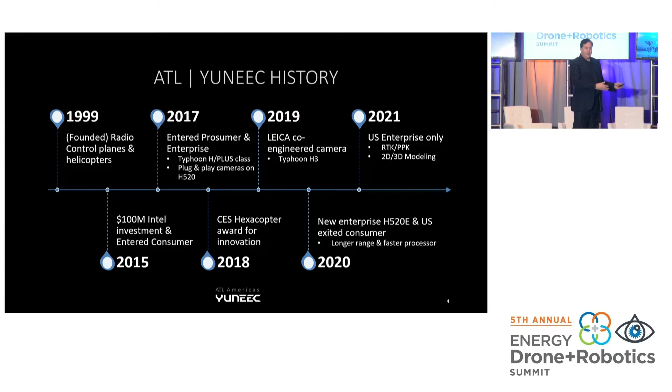If you've been paying attention to Yuneec, the company has a lot of attributes on the drone side. 2015 is when Intel made a $100 million investment to go into consumer drones. In 2020, we exited consumer drones, but along that way, it came up with an award-winning hexacopter design. That's what you see here up front. We'll show a little bit more about that. Great stability in the wind, good size, good performance, good pricing. And the company is exclusively focused now on enterprise drones and turnkey solutions.

So for the energy sector, what are we trying to do? We need a robot that's going to collect data. So here's a robot. This happens to be the Yuneec one, but all downstairs, there's many versions of these, and you've been hearing about all day.

What do you need? You need something that's stable. It needs to work all the time. It needs to be reliable. A windy day can't defeat you. A rainy day cannot defeat you if you're going to be doing this 24/7, scaling nationwide. The data needs to be secure. Lots of discussions on the cybersecurity front there. Best way to make it secure is don't broadcast the data, leave the data on the drone, only the user can access it.

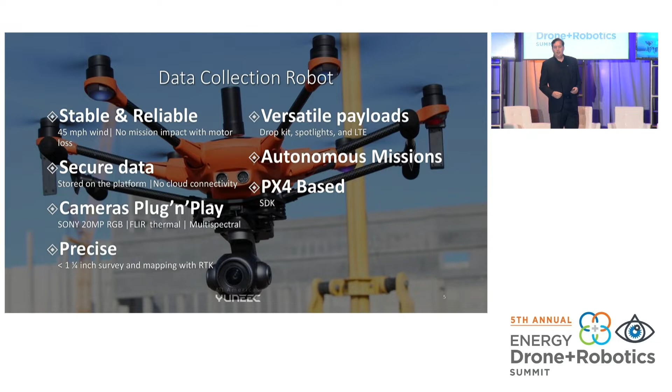No one camera does it all, so it needs to be versatile, plug and play on that. Of course you need precision. An RTK solution can do that. There are other ways to do that. Versatile payloads. What if I want LTE? We heard from Skyward this morning about their LTE network. What if I need a drop kit? All kinds of things. It should be autonomous. Today, one of the things that slow us down from scale is one pilot, one drone. How do I make more autonomous missions? And many of you would like it to be PX4 based, open source, I can add my own attributes to that particular drone or UAV.

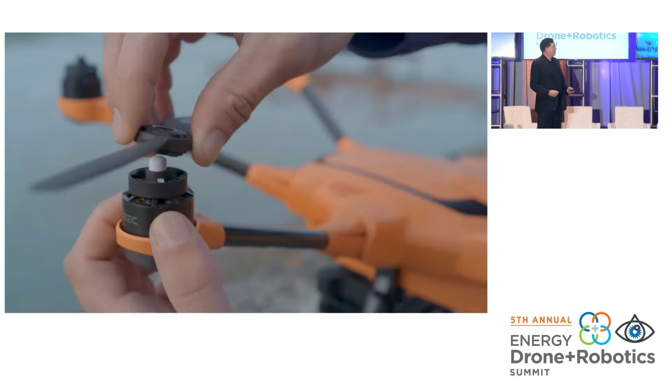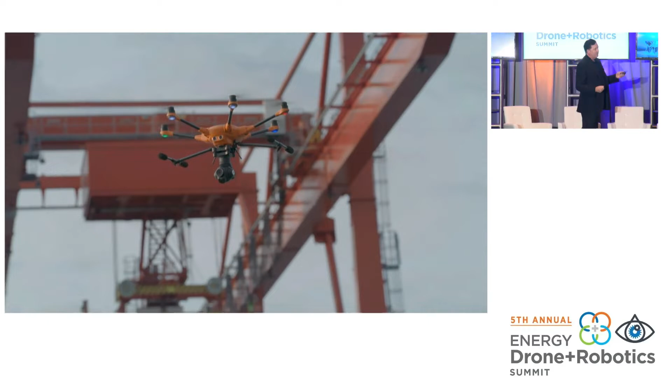So let's take a look at what this robot looks like. So here we have something that is carryable. You can also see it up on stage. I can have two pilots for safety, one looking at the payload, one flying the particular drone. This particular case, the landing gear goes up such that the camera can see 360 degrees. So I can fly the drone in one direction, I can point the camera in another.

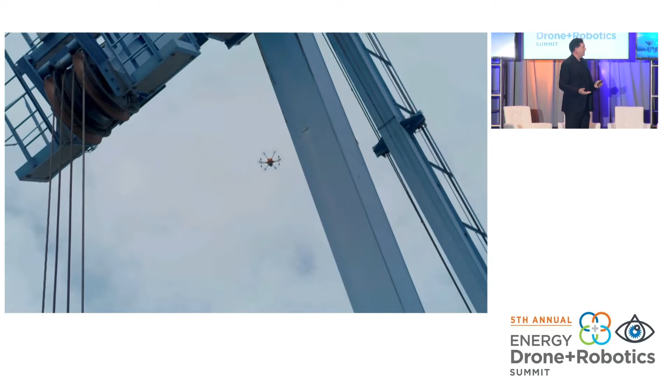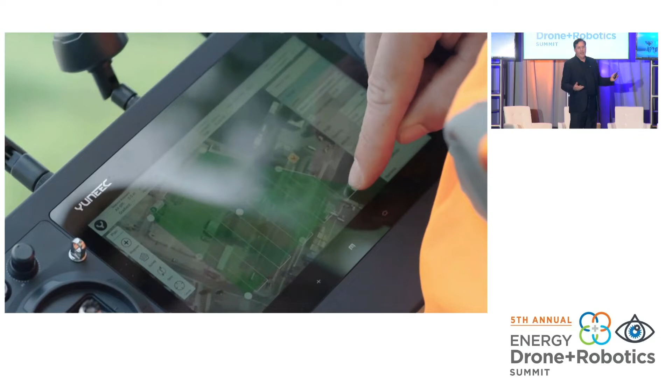Again, that's versatility. So here you can see that the drone is flying around in a port environment, very heavy in metal. I can do my autonomous mission. So here I'm looking at a map. I'm deciding where I want to do. This is a construction site that we're looking at here.

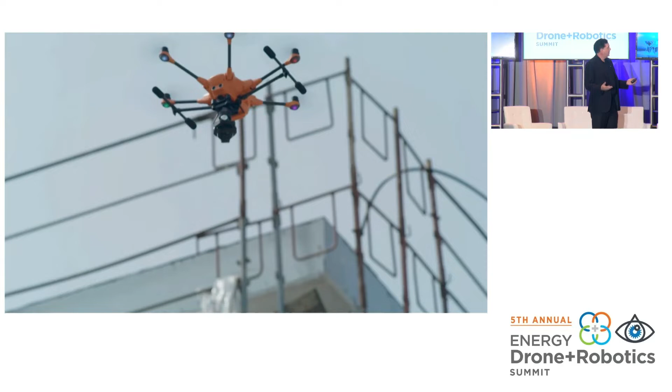It needs to be easy to fly, easy to use, portable, as I've said before. So here I'm showing you that autonomous mission, because now I want to fly a mission. Maybe I want to fly it one day, every day, once a week, once a year. I want to see what has changed time and time again.

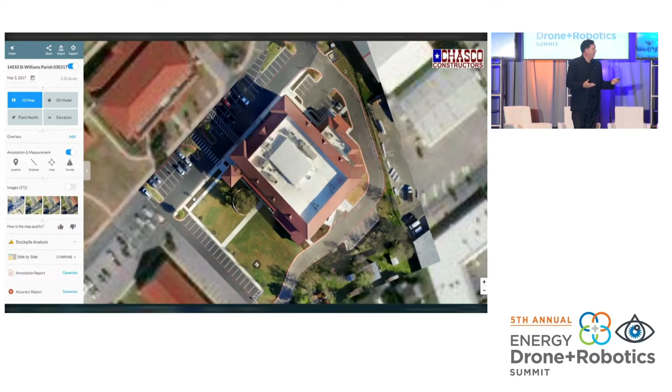So that mission planning needs to be simple. Here's some tools that are showing you what has changed over time. This is using, again, photogrammetry, the drone, the camera, in this particular case, a well-known data side.

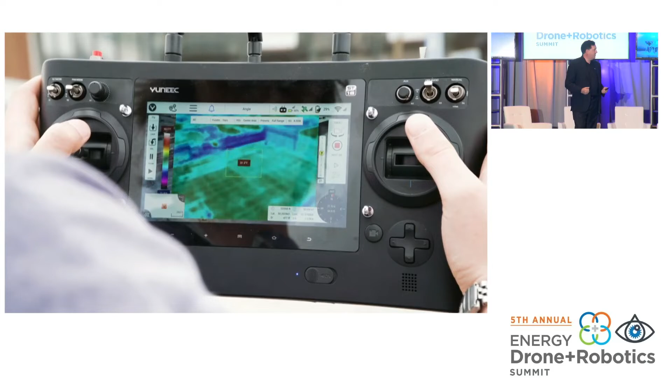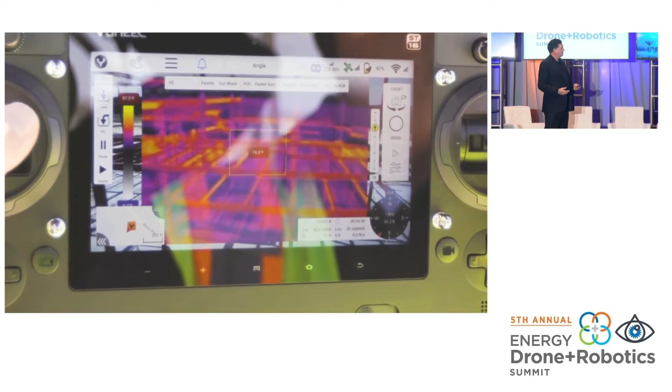Here I'm using a thermal camera for inspecting a building. I'm actually inspecting the quality of this particular building. This is actually Chasco Constructors here in Texas. So again, that versatility in cameras. Lots of different types of things that one can inspect. We have a customer in Arizona who uses the drone for orthomosaics, so they can actually make a commercial view

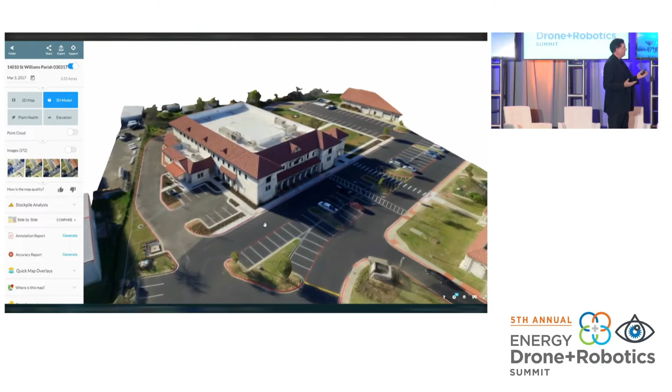of the building as it is constructed over time. But this could be a power plant, this could be a gas plant, this could be a pipeline that we're doing with these things. So here we're inspecting a particular roof. This is a 640 by 512 FLIR sensor. This was actually a project that Universal Aerial Ventures had. The straight lines there are actually the power lines on the roof of the building.

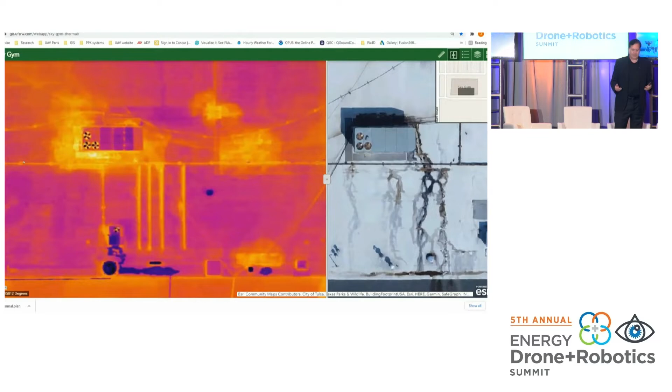I can detect water leaks. But this is a real service providing actionable data.

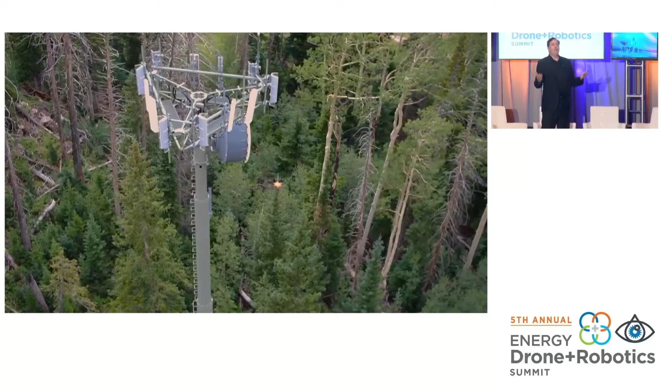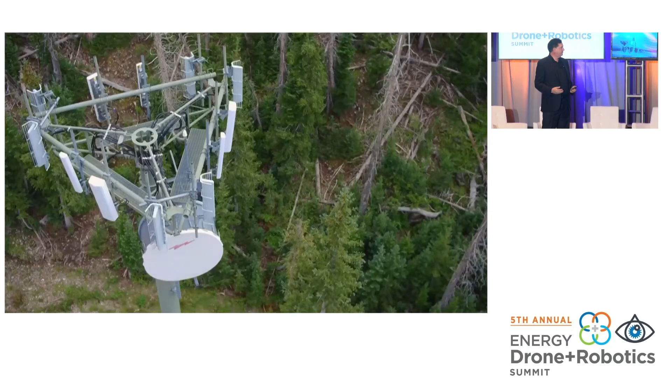Here in the final segment, towers. I want to inspect a particular tower. Stability in the wind is key. Again, reliability, everything that we've talked about, those attributes, for a particular drone. We know many tower companies would like to be able to see the labels on the back. I'm not sure I recommend flying as close as this pilot was flying to these antennas.

They are expensive, but that's the robot. It's three-dimensional, it's carrying a sensor - it can be a methane detector, it can be a camera, it can be thermal, whatever you need for whatever it is I'm trying to measure. If I'm trying to measure any type of change, you want that versatility.

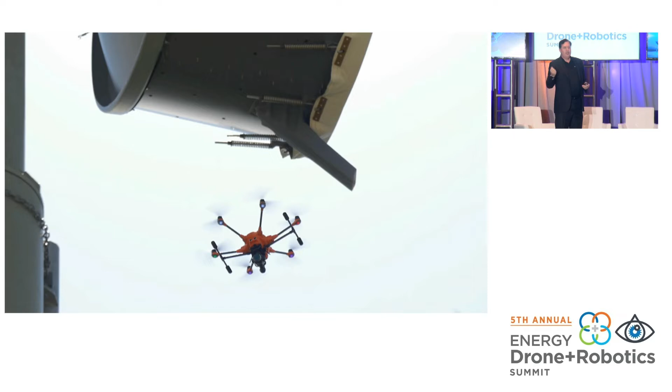So robot, data collection - we've talked quite a bit about autonomous missions. There's no such thing as one size fits all. I might want to survey a structure. I may need a particular corridor that I'm looking down if I'm doing a highway inspection or a long pipeline. Or a wall or facade if I'm doing that tower type of inspection.

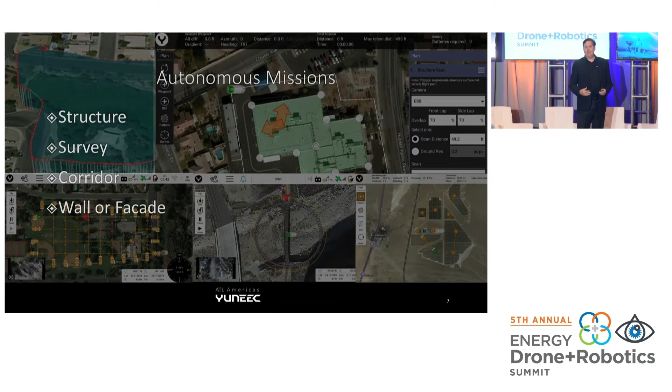Again, these are just attributes. Obviously, we're showing you here the Yuneec drone, but these are the attributes you're going to want in any type of UAV. So now that we've collected the data,

what do we need to do with it? So I have this data. We've partnered with a company called Skyline Soft. This is using their PhotoMesh and Terra Explorer. So here, a drone just like this was pulled out within about 10 minutes. It's flying a particular mission, and a few hours later we're looking at specific measurements within centimeters of what's going on. What you saw earlier was trying to fix what a fence line should look like.

This is for public safety. I want to see the sight lines. The green is what the person can see from that spot. The red was what I couldn't see.

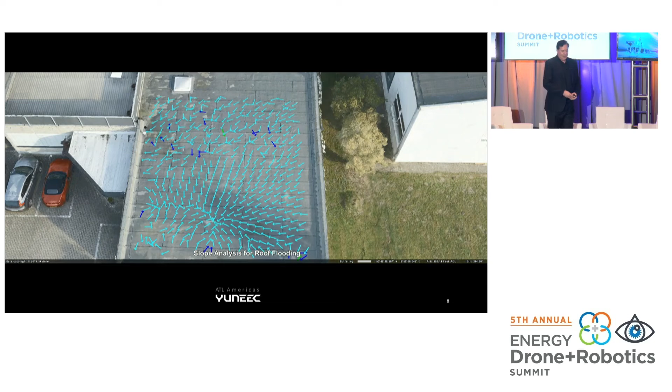Here I'm going to look at slope, like where would water collect? And I'm just looking at a picture here that the photogrammetry gives you, but then the drone is providing that actionable data - do I need to do something different to my building? Here's a quarry. This was taken one week apart.

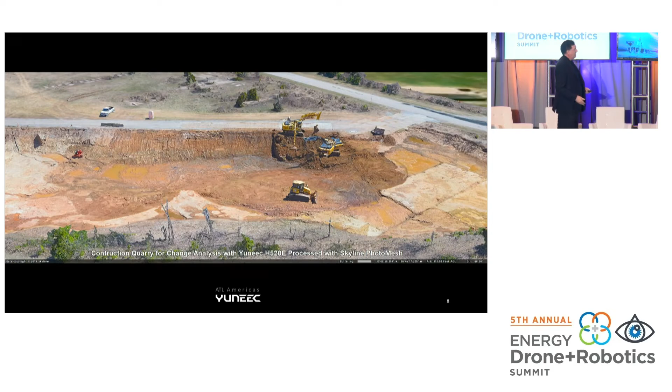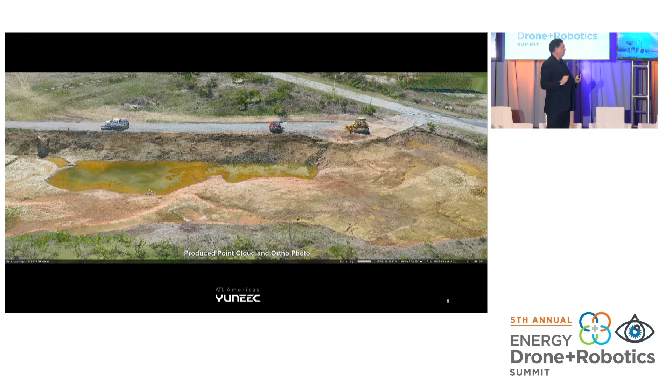So you create a point cloud or an orthomosaic. What you're going to see here is if it's blue, it's new, and if it's red, it's been removed.

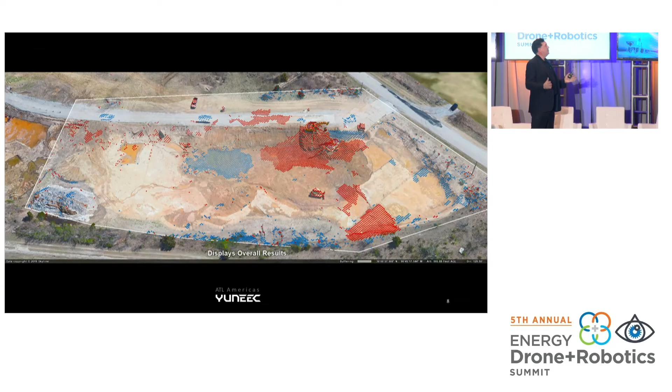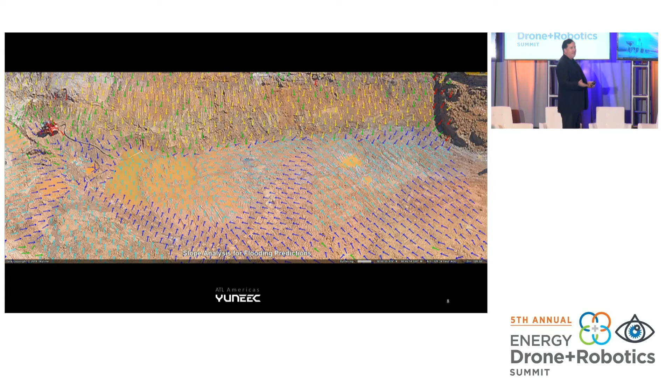So you can measure very precisely how much earth was moved or how much was changed in this particular period of time. I've got the robot, I took some data. What am I going to do with that data? Here we're looking at slope again. It's actually misleading to look at the water that was collected, it doesn't tell you anything.

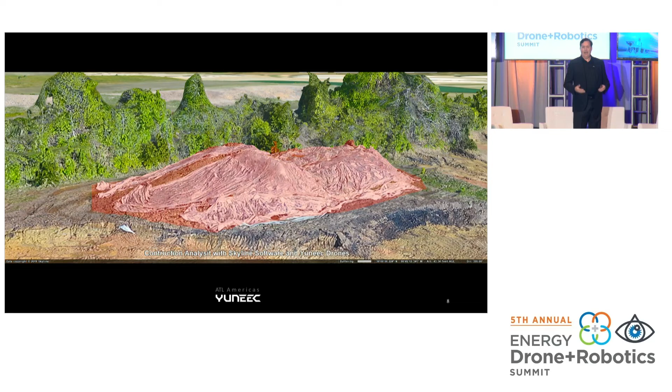It just says water collected over some time. Where did it go? What direction? Here I can measure the volume of what has changed in terms of dirt, in this case earth being moved. But this could be anything, right? It could be a methane detector, which has been talked about a lot here at the conference.

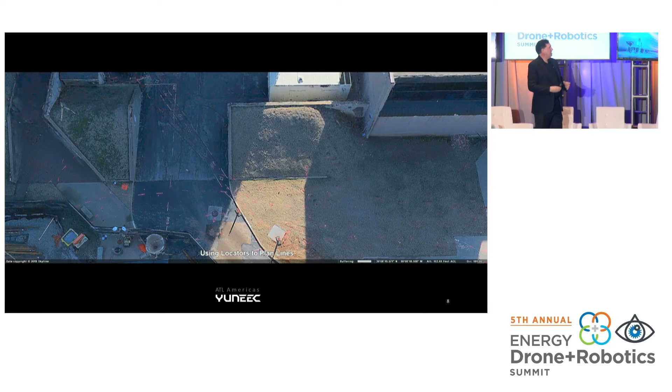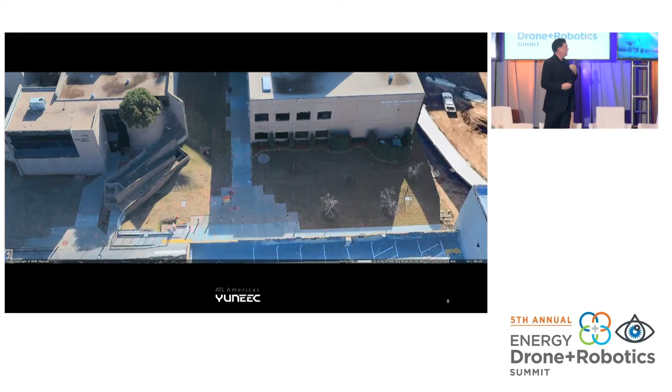This happens to be the OSU Medical School. Here's a drone flying. There are particular attributes to being able to do this in shady spots where you can see these orange markers. This is where some construction is going on. This proves to us that the digital twin is very precise.

Now I want to do something. I want to know where to put the pipes underground. So with the software, this drone turnkey solution, I can manipulate my data. Where am I going to lay these pipes underground?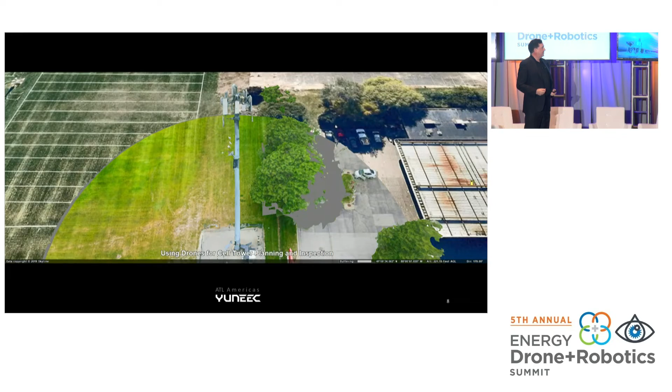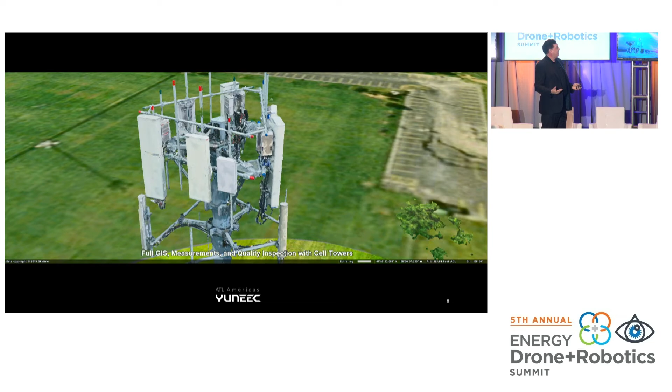And then finally, we were talking about that tower inspection. I want to make a digital twin of that. We heard quite a bit about that earlier today. So here's my digital twin. Is the antenna where it's supposed to be? Has anybody stuck something on?

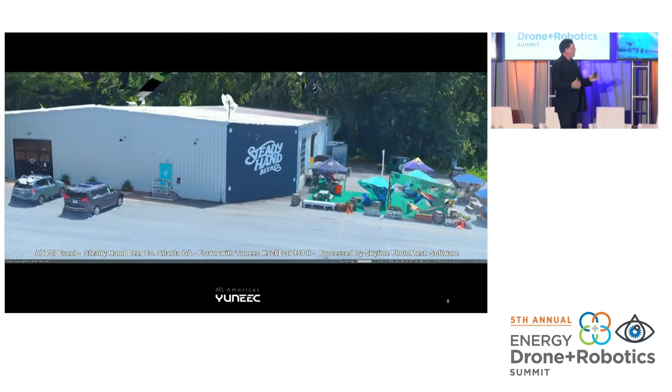This last one is for fun. This was done at AUVSI in Atlanta at an FAA event. This was literally get the drone, a 12-minute flight, under an hour of processing, and we're rendering this digital twin right here, right now.

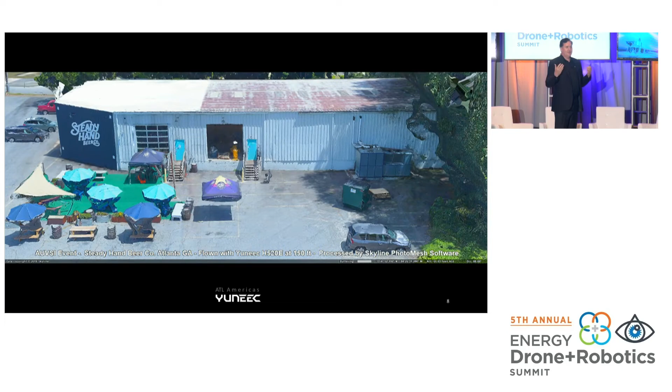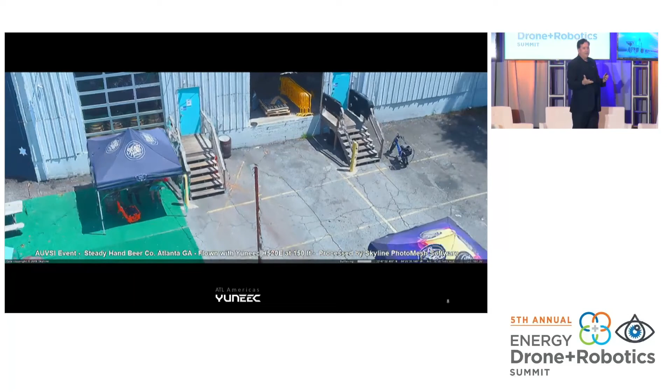If you were in the keynotes this morning, KVS Technologies and Sprite were talking about how they take their drone, put a lot of automation in, but deliver an actionable answer. Is there something that needs to be fixed on the power grid lines? That's what I think this summit is all about. It's not which drone is better, what camera is better, what software is better. It's what data can you have, and then what can you do with it?

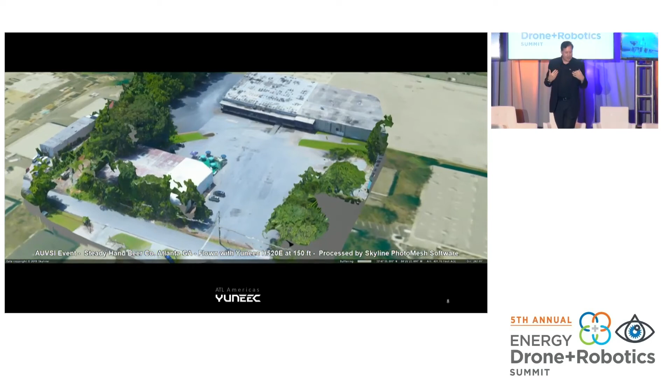So we're a big proponent of just trying to present a version of that.

Now, this particular one is probably being used in a commercial for this microbrewery Steady Hand, which makes mighty fine beer, I must say.